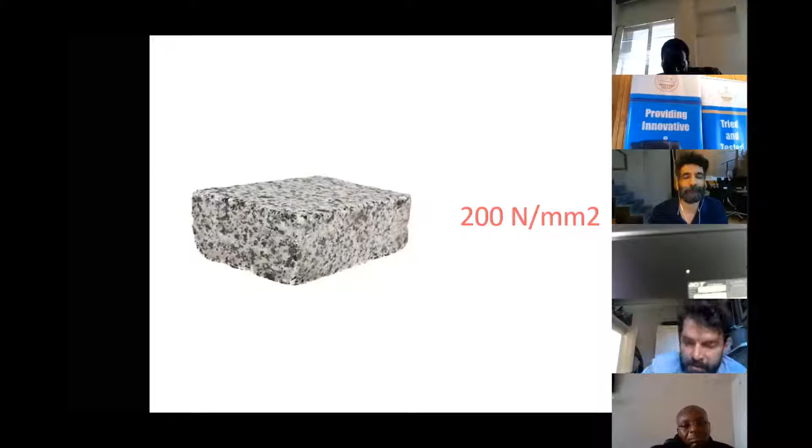Typical stone, so this is a lump of granite, might have a strength of 200 newtons per millimeter squared. We work with granite, we work with limestone, we work with lots of different materials. Even the weaker stones are about 100 newtons. We typically take that piece of stone, we crush it into gravel, we use an enormous amount of gas power, and we burn limestone to make cement.

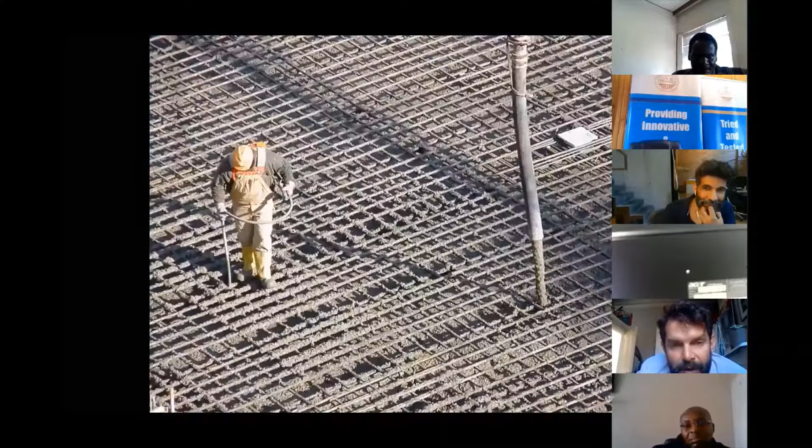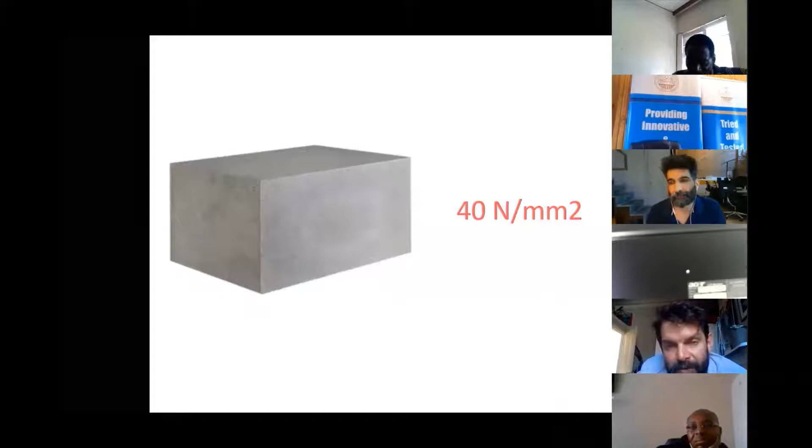We batch it with fresh water and sand, sharp sand, which is bizarrely becoming scarce. We get a lot of reinforcement, formwork, we pour the concrete, we vibrate it, we let it set. At the end of all of that, 28 days later, we have a piece of concrete with a strength of 40 newtons. So my contention is that really it would be much better just to use the stone in its raw state, far less energy intensive, far quicker, far less involved.

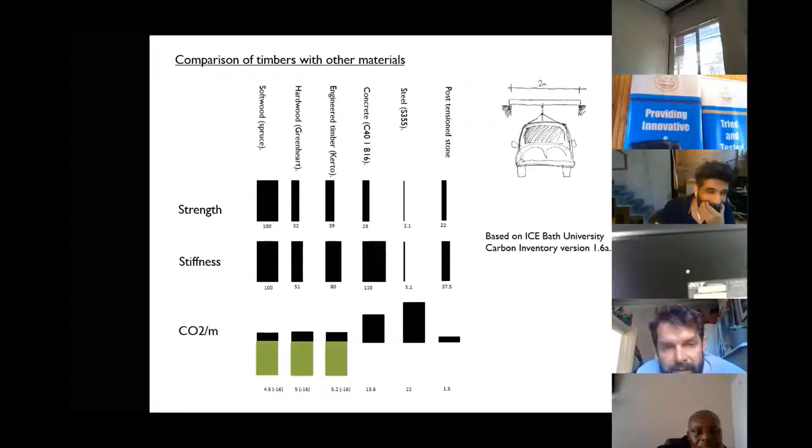We're quite often trying to compare the effectiveness in terms of carbon footprint of different kinds of materials. So this is a slide that shows a whole series of beams that can support a 1-ton car across a 2-meter gap. On the top row, all of these are strong enough. So you have the softwood, 100 millimeters by 200 millimeters. They're all equal depth. Hardwood, engineered timber, narrower. Concrete, 28 millimeters, and steel, 2.1 millimeters. These are not sections that you would necessarily use, but they're a pro rata rectangular section depth.

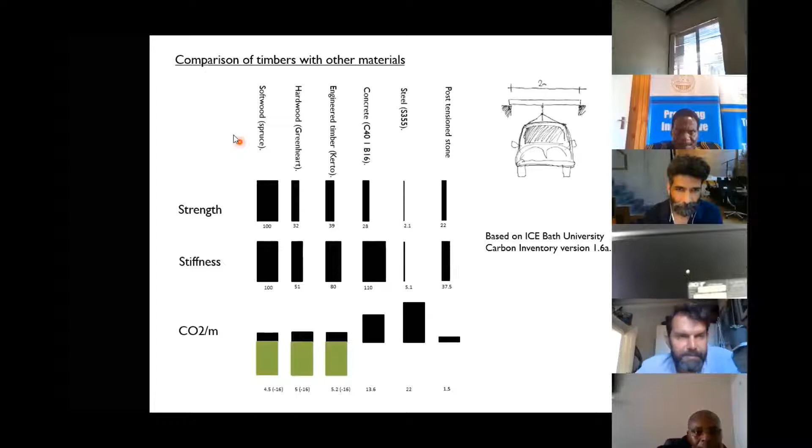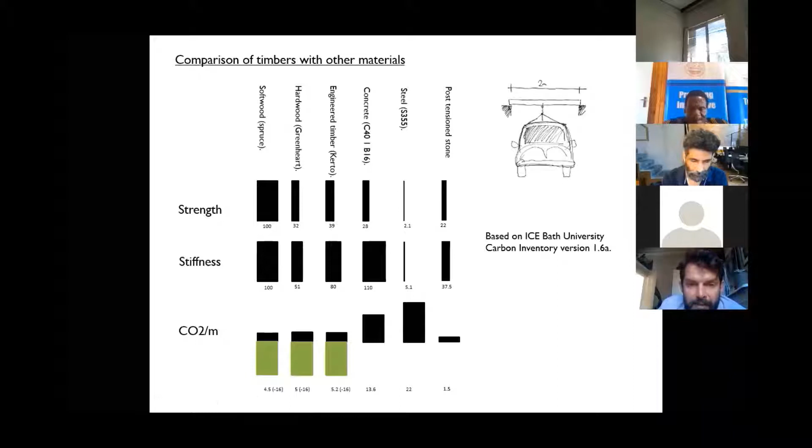On the row below are the stiffnesses. The stiffness relationship is slightly different from the strength relationship. And on the bottom row are the carbon footprints for each of those beams. So this is comparing the effectiveness of the beam in achieving a particular goal and the carbon footprint involved in achieving it. The steel has about 22 kilograms of CO2 per meter, concrete about 14, post-tensioned stone, that's a stone beam with a piece of post-tensioning rebar through it, has about 1.5 kilograms of CO2 per meter. So you can see that in comparison to steel and concrete, stone is really effective.

So I'm just going to see if I can change that slide.

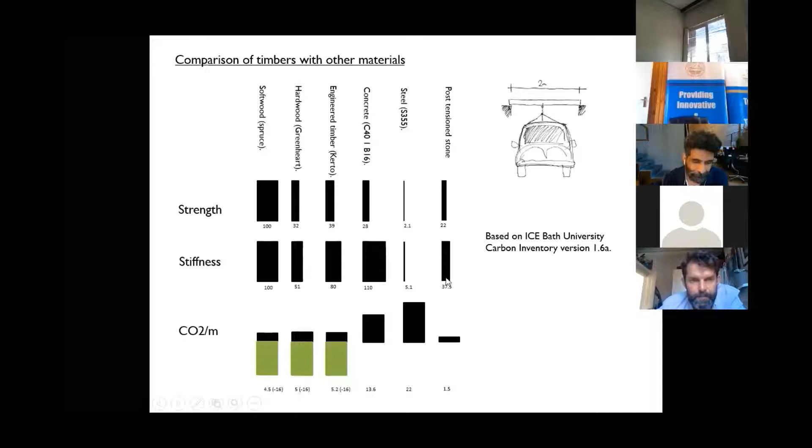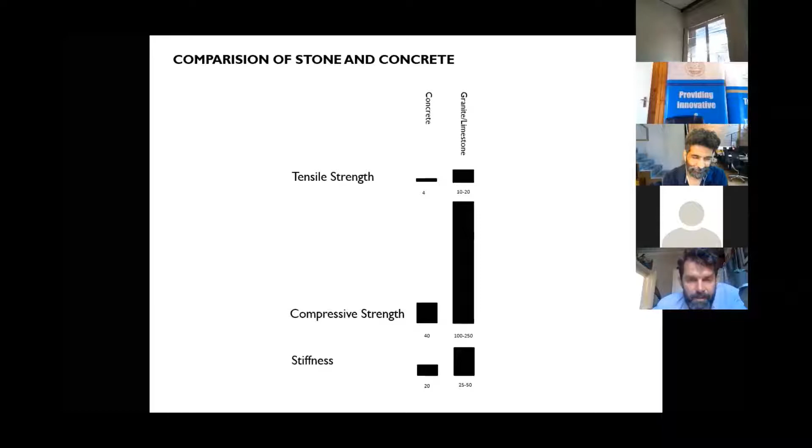Then the stiffness. Stone doesn't suffer from shrinkage and creep in the way that concrete does. So one of the main drawbacks with concrete is obviously the long-term creep and the shrinkage effect of the concrete. Stones behave differently. Different kinds of stones behave differently, but by and large, stone doesn't suffer from that kind of problem. But on the other hand, stone is a natural material.

And I think engineers and other practitioners prefer a homogenized material because they know how strong it is. So if you kind of whip everything up in the blender like concrete and then you let it set, then you have quite a consistent material achieving similar cube strengths all the time. Whereas with stone, it's more of an unknown quantity. People don't know what to expect.

So we take samples of the stone that we're going to use. We test all of those samples. We take 10 to 15 samples in flexure. We do a normal distribution of those. We take the lowest expected value based on 2 standard deviations. And we apply quite a high factor of safety. So we're totally secure that the stone is going to be acceptable in its use with that level of redundancy.

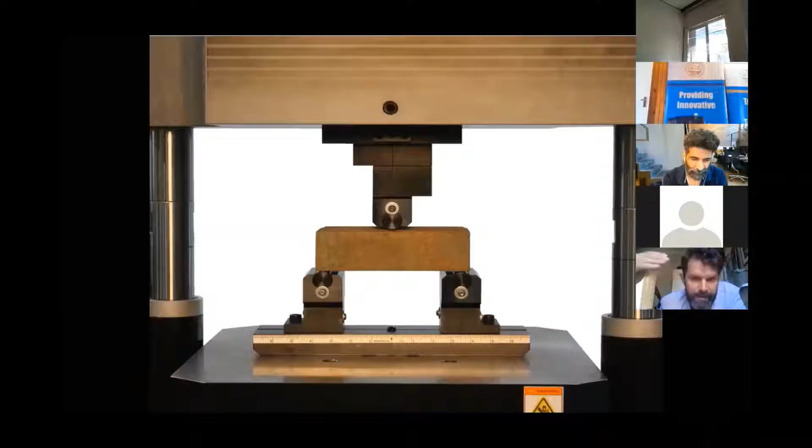Actually, if there's a future for stone, I think it'll be in better assessment of strength, non-destructive assessment of strength. So this piece of limestone here failed at something like 60% of the expected value because of the ammonite. The ammonite is in the worst possible direction for reducing the strength of the section, and it's completely invisible from the outside. So you need to account for all of those variations.

We started designing stone. Well, in actual fact, this is what we would describe as a cantilever stone stair. It doesn't actually cantilever. The tread above pushes down. The tread below supports it. The tread in between is prevented from rotating out of the way by its fixity to the wall. So we're converting what is a cantilever moment, normal to the wall, into an in-plane torsion of the wall connection, which means that you can get stone stairs to stick out of walls in that way.

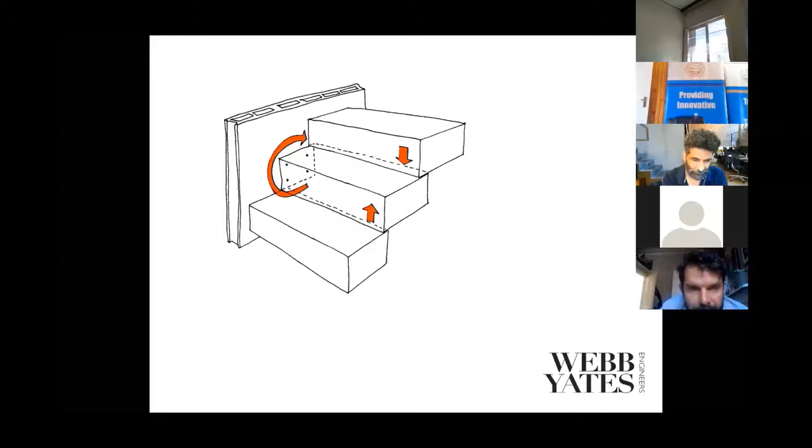So we started designing staircases like this with timber. So this is a staircase that I made myself, which is why the workmanship is so terrible. But this is a whole series of plywood boxes screwed onto a 50mm terracotta wall in my flat in Spain. 6 wood screws, wall plugs, bit of glue smeared over the paintwork. This wall is 50mm thick, hollow terracotta tiles. There's absolutely no way that this is cantilevering. So this is a kind of demonstration of that principle.

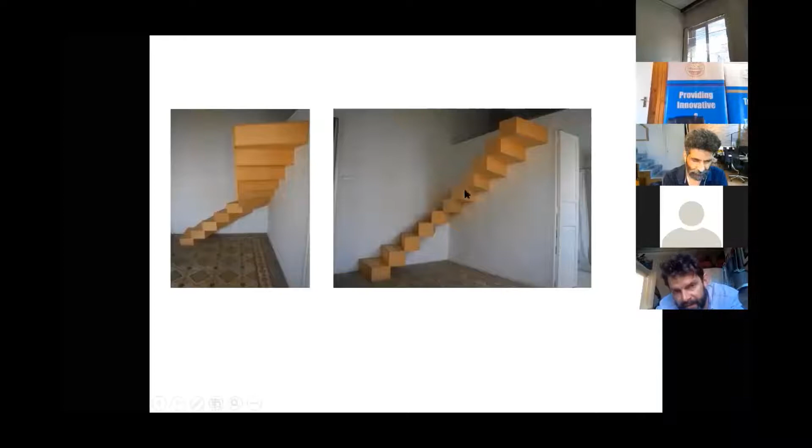So we started doing lots of staircases like this. The one on the left is a solid oak one, and the one on the right is a plywood one. Pierre, the stonemason, came to us and said, well, if you can design these stone staircases in timber, then maybe you can design them in stone. So we started to design what we would call, in inverted commas, traditional stone cantilever staircases.

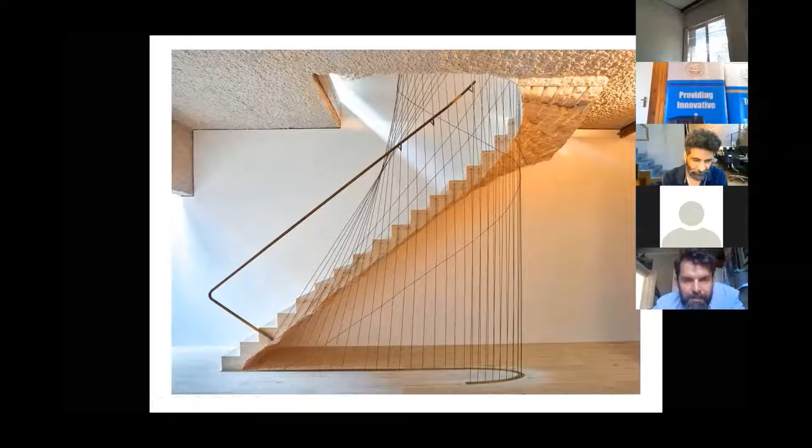This is a modern version where we've cut away some of the low stress stone, and this is a project with Amin Taha Groupwork. So this is quite a non-traditional stair. There's a rough cut finish to the underside, but the principle of each tread being built into the wall and working in that way is the same. The cables in this instance are just for containment of the balustrade. They're not there to support the stone treads, and in actual fact, the cables take support from the stone rather than vice versa.

But Pierre, the stonemason that we were working with for so many years, could only sell staircases, or his company could only sell staircases to people who have a stair flight and an adjacent wall. So it's kind of limiting in terms of who you can sell stairs to. So he was very keen to develop a free spanning stone solution.

So we started looking into reinforcing the stone, and we're certainly not the first people to do this, although it's still quite rare. So this was an early test. It's a 3.2 meter span. They're 50 millimeter thick, essentially flagstones or paving slabs. There are two 8 millimeter cables with 5 tons in each cable, and the cables assume a parabolic trajectory so that the sag in the cables resists the dead weight of the stone, and the tension in the cables pushes the ends of the stone together.

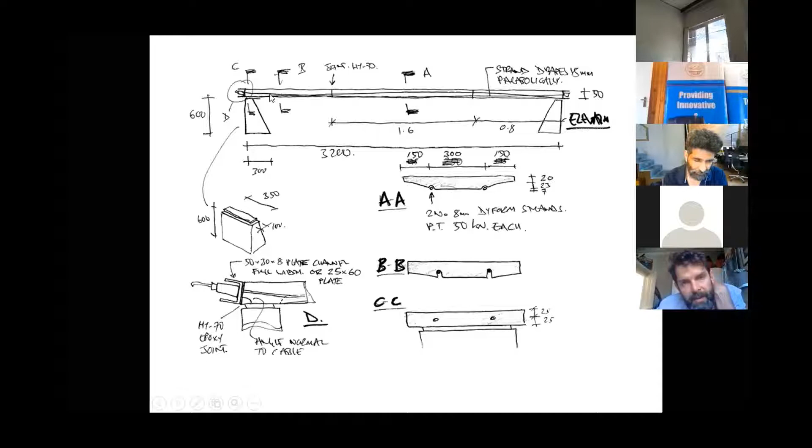So with this, we were able to make this bench. It spans 3.2 meters under a full domestic load, 50 millimeters thick. So to get the equivalent behavior out of concrete, you probably need 100 millimeters. So it's a very nice demonstration of just how thin and effective reinforced stone can be. We gradually started making small reinforced stone straight flights, and then helical flights, and got more and more ambitious.

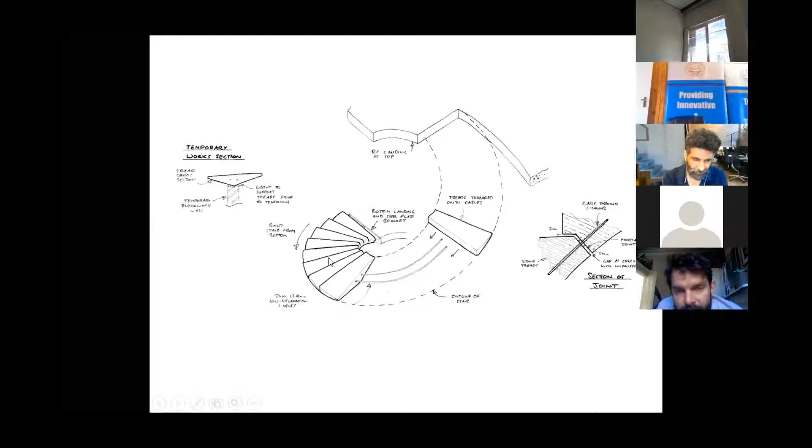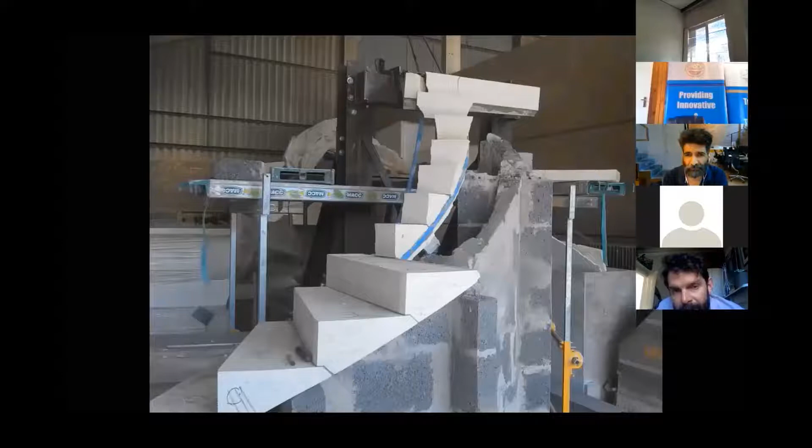This is a staircase in the north of England. It's got a 270-degree helix. It's got two 12 millimeter cables through it with 12 tons in each cable. This is a test with Pierre and Paul at the Stonemasonry Company. The tensioning order was very important. This test failed because the application of the tension wasn't in the right order. And it failed quite dramatically, but we learned a lot from that.

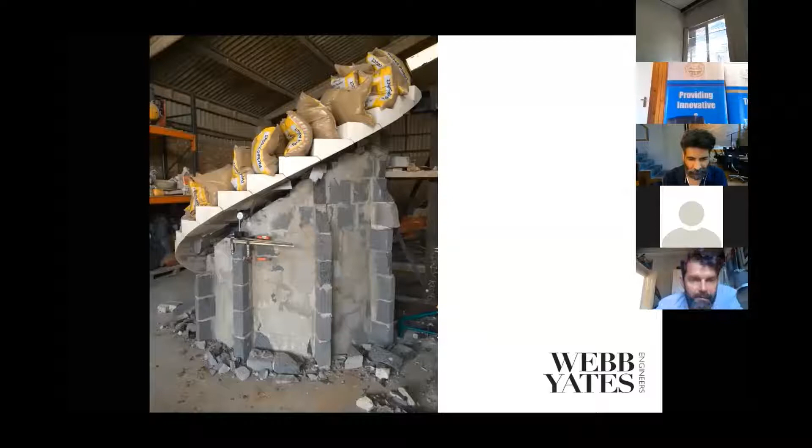And I think because there's no codification for this form of construction, you really have to kind of learn on the job, which I think is interesting and also a little bit intimidating sometimes. This was a successful test of that stair at 75%, and this is a finished stair. So we've done now, I would guess, 30 or 40 staircases of this kind.

That stair measures 1.4 meters. Each tread is solid stone. There are two 12 millimeter cables running through there. There are two flights, 270 degrees. So really that's quite a thing. And you know, we're getting paid reasonable fees to design things like this because they're for rich people's houses. But actually you can see from this demonstration that making simple columns and beams would be very easy, you know, by comparison.

Then we were designing some staircases that were, in this instance, going to be a steel stair clad in travertine marble. And we were thinking, well, we can post-tension the stone, make it solid travertine, post-tension it. But then we were thinking, actually, what's really interesting is not reinforcing it. So there's a whole wealth of Gothic architecture where people are building massive structures without any reinforcement, very pure, very simple. 1,000 years ago, I think we would really struggle to design some of those buildings today.

So this polystyrene model is the way that we were trying to work out whether this staircase would balance. So there are lots of different components in the stair that interact in different ways. It's quite difficult to analyze with a computer. If we can make it stand up in polystyrene, then we can definitely make it stand up in stone. So we were able to make this thing stand up. Because it's so light, if anyone breathed or sneezed or coughed near it, the whole thing collapsed. But actually, it will stand there for a few seconds.

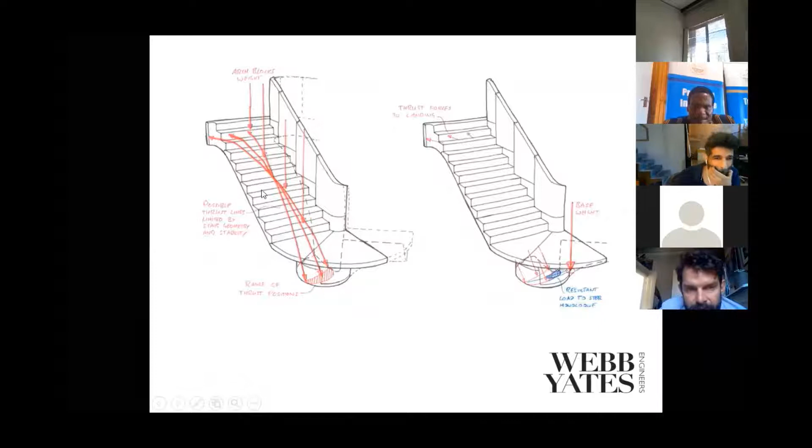So what we're doing here is forming an arch on one side, a traditional stone cantilever stair supported by the arch, and then torsionally interlocked segments on the landing. It's hollowed out to make it a little bit lighter, and that's the finished stair. So there's a balustrade, and all these stairs, we take the photos before the balustrades are fitted, so you can see more clearly what the structure is.

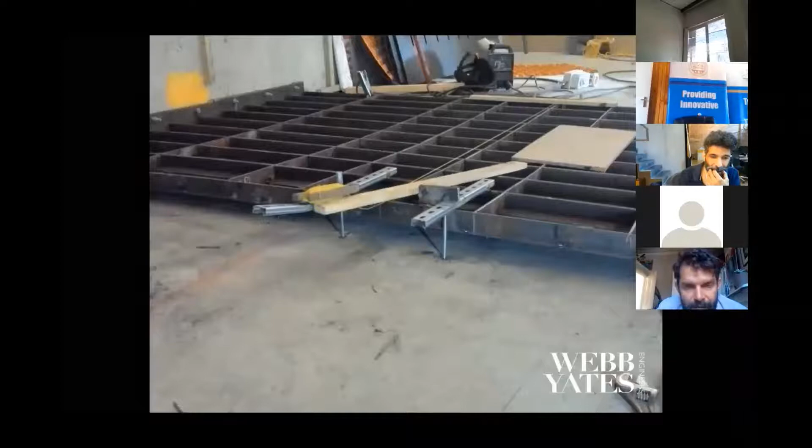This is by Atelier Romeo, Italian stonemasons, and Jamie Fobert, architect in London. But yeah, this is totally unreinforced. No steel, no cables, no tricks, just stone. It's on the 5th floor of a very old concrete building. We needed to support the weight of it.

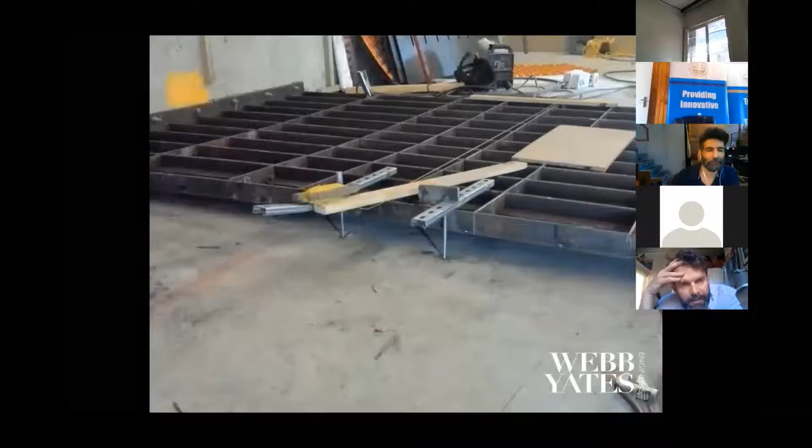Initially the idea was to have a whole series of very heavy I-beams to support the weight of it and actually step up when you got to the bottom of the stair onto a platform. But we were thinking it was a bit of a shame to have that interruption. So this plate is 50mm steel waffle plate. It's fabricated to curve upwards, and then it's jacked flat.

And then when the staircase is built on it, the weight of the stair equalizes the upward curvature, so that all of the dead load is carried to the supporting walls on the left and the right, and none of the dead load goes into the slab underneath. So it's kind of a good way of holding the stair up.

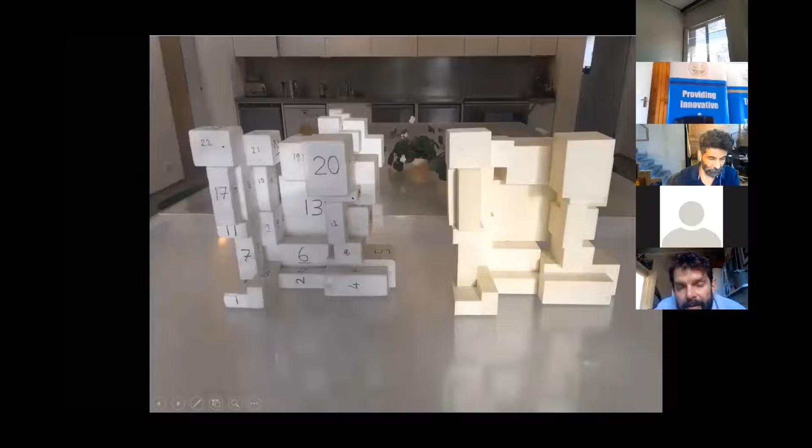He wanted this to last for 200 years, to be rebuildable, and so quite difficult to bolt it together. We couldn't see any fixings and connections. So that's Antony Gormley. So we were looking to see if we ordered the fabrication in a certain way, or we ordered the erection in a certain way, then we can make these stones lock themselves together.

So the one thing is they need to stand up under their own self-weight, and the second thing is if a bunch of drunk rugby players climb up the back of here and try and push that off, they can't do it. So we actually very slightly changed the order of the blocks from his original design. So you can see this block here catches the back of that one. So this one, which carries the load from here, is in balance with this one.

The head on top. There are a whole series of tenons and in fact kind of Lego studs that sat on top of the stone. So the stone, if you put one stone on top of another with a flat surface, obviously it rocks because the surface is never completely flat, and as a consequence you don't really know where it's bearing.

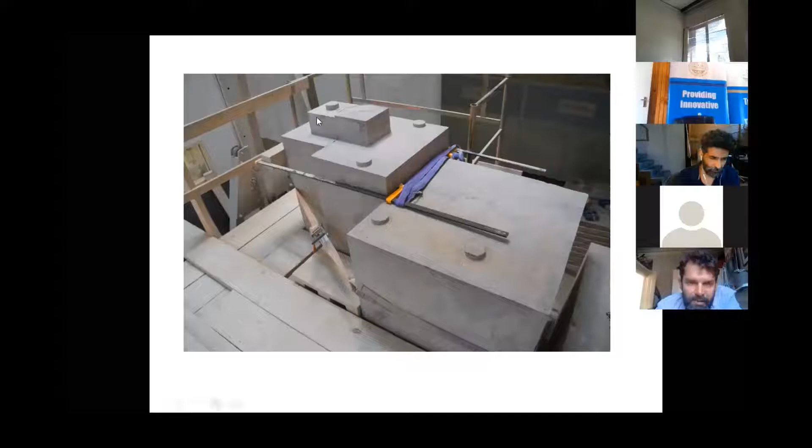If you put 3 Lego studs, you know exactly where it's bearing because it can only sit on the 3 points. So all of those connections are made with these studs. Occasionally there are projecting tenons that are brought together by a subsequent stone. And then this project is Amin's building in Clerkenwell that he's no doubt going to talk about in more detail in a moment.

We developed a lot of know-how with stone because we're designing rich people's staircases, but actually our idea is that it's quite a good thing from a sustainability point of view and just from a point of view of pure logic, to reintroduce stone as a structural building material. So we had the opportunity with Amin to design this building.

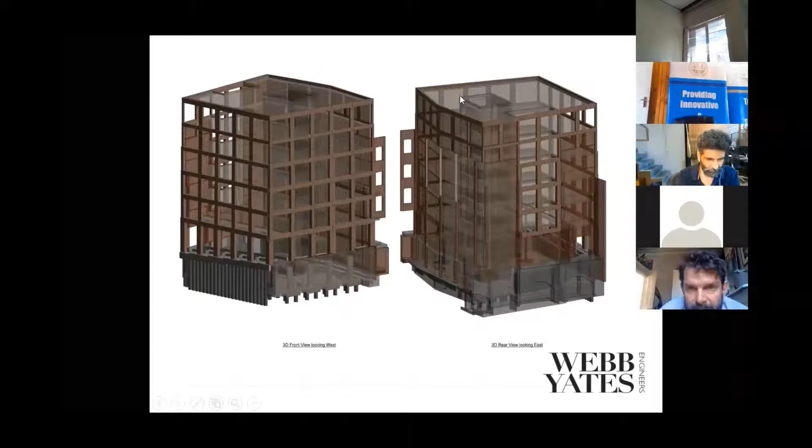It's a concrete frame on the inside. So you can see this is our Revit model. You can see the core, concrete stability core, 275mm thick flat slabs. That's the only concrete structure, no columns. So all of this brown stuff is the stone, load-bearing stone supporting the concrete slabs.

So here you can see, because you don't want to have a concrete contractor coming to site and building a little bit, and then a stone contractor coming and building a little bit and going away again, and then the concrete guy coming back and them all blaming each other for delays and interruptions on site, we thought it was a better idea to build the whole concrete frame first and then to build the stone afterwards.

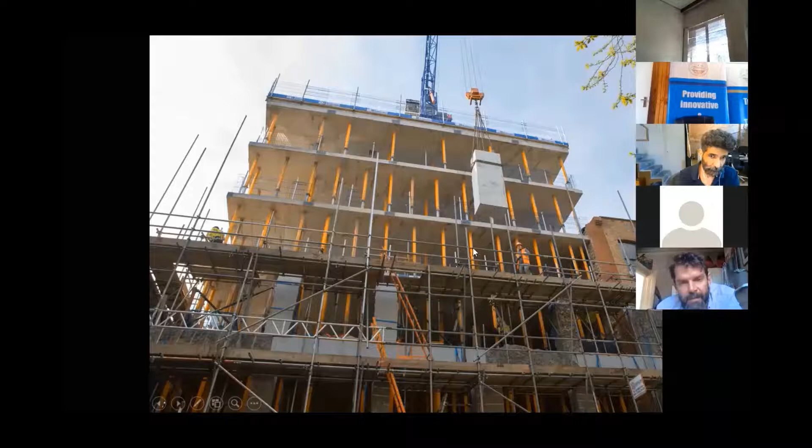So the whole concrete frame is built on these yellow props, temporary formwork, and then the stones are lifted in single pieces, then the temporary props are removed. So that's the finished thing. People are very surprised and really pleased that it's a load-bearing stone building. I mean, they're load-bearing stone columns. It's been going on for thousands of years. I think it's somewhat surprising that people are so amazed by it.

We were thinking, what can we do with stone in other parts of the building? So if you make a stone vault, it's obviously got a lot of curvature.

It's not very convenient for a lot of building types. How can we make a flat vault? So these are 40mm Portuguese limestone, 500mm square tiles. So rather like a plastic tile puzzle where you make the face of Mickey Mouse or whatever, the plastic tile puzzle doesn't have any rails in it. The tiles don't fall out because they're interlocked torsionally.

So here, this is supported on the edges; it spans 3 meters in both directions. There are no cables or reinforcement. The corners are clamped together so they can't move up and down next to each other, but that's the only connection between the stones. There's no moment connection between the stones.

Basically what happens is one piece of stone is supported on 3 corners, making the 4th corner stable. The next piece of cut stone is supported on the 2 edge corners and the corner of the first bit of stone. The one after that, the same. So subsequently, you can build the whole thing out like that in maybe an hour and a half or 2 hours. We built this thing.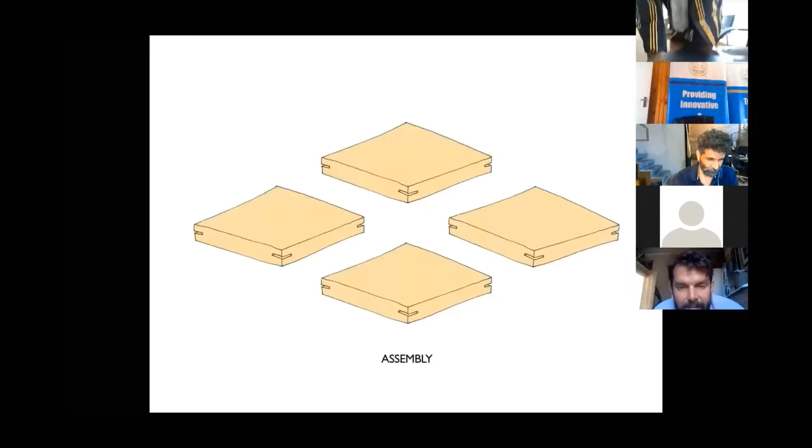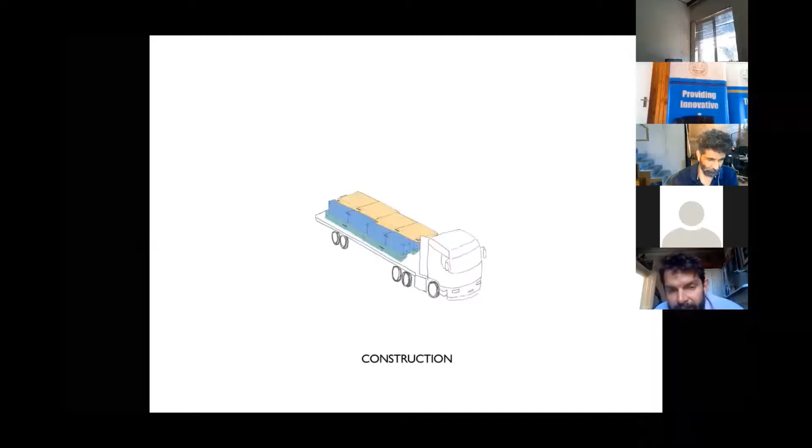So this is kind of postulation for what a building system of that kind might be, bringing together the various things that we've learned with staircases and Amin's building and other stuff. So you might have standard beam components that are post-tensioned together, standard column components and floor plates, build columns and beams and floors. There's hardly any reinforcement in this, very low carbon, it's demountable and rebuildable.

So this was a kind of prototype, not a very pretty prototype, I have to say, of that kind of construction. So you can see the beam, the end of the post-tension rod columns, and the floor plates built into there. And there's me jumping up and down on the end of it.

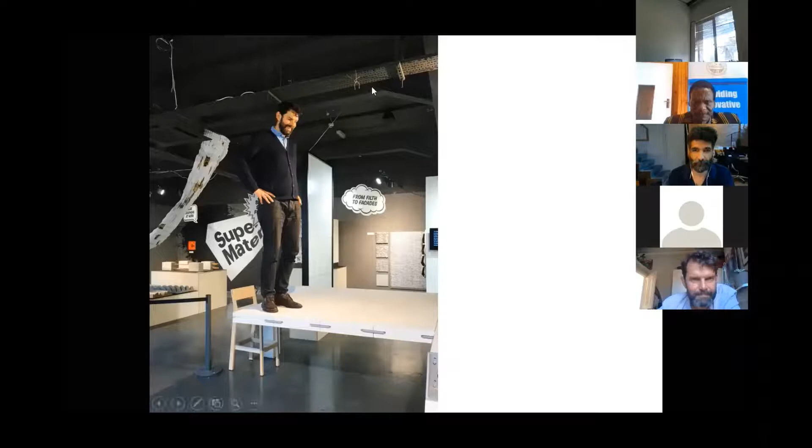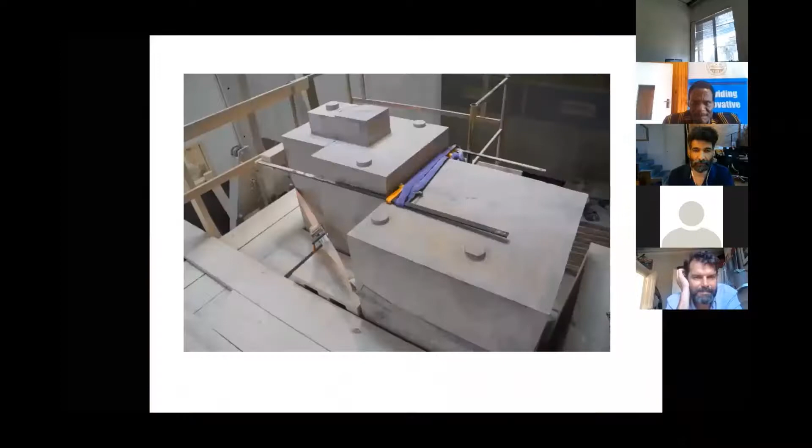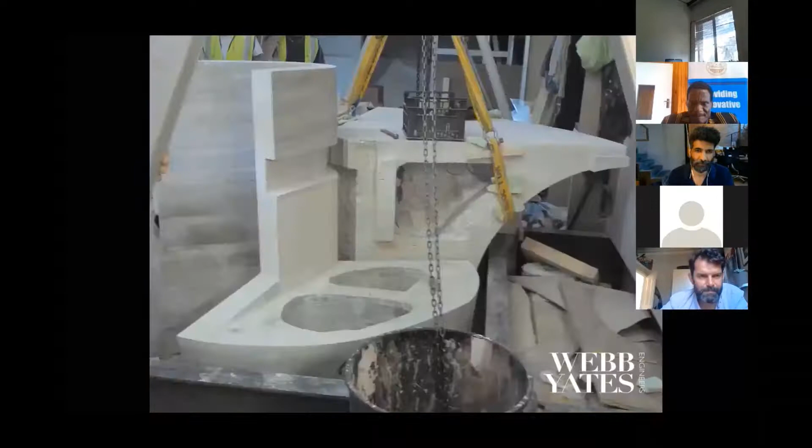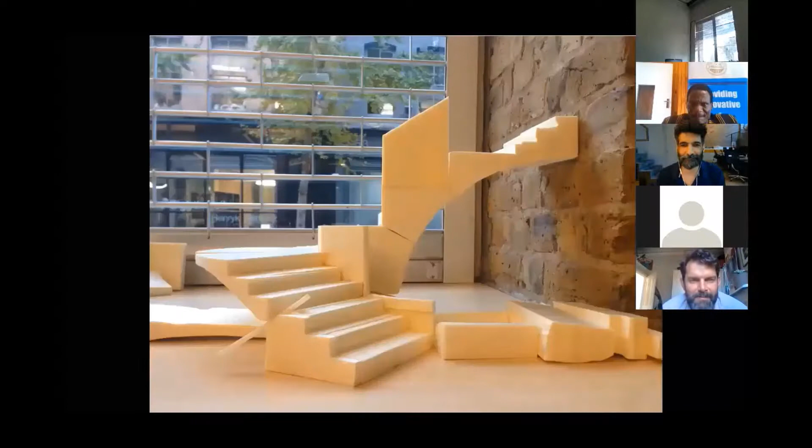Okay. Aha, I think I've got control. There you go. Where was your Caroline Place, before or after this? About a quarter of the way through, before. Keep going. Blimey. It's an epic, isn't it? So everyone's still here. You're going the wrong way. Oh, I thought you said after. Okay. Thank you very much. No, it definitely is because it's before all this. Oh yeah, there we go. Is this the only slide you have of it? Yeah. Okay.

Now, the only thing I'll add about this is, if I can annotate, this staircase is essentially, as Steve described, bolted into, fixed into the wall, and then obviously one tread is resting on the other. Now, normally with these sort of staircases, you'll end up with about 40% of stone wastage.

What we asked the stonemason to do is essentially take one block and cut it into two treads, so it minimizes the wastage. It's much easier to do when you get a straight run, but slightly complex once it becomes a spiral or a helix. But what they did is, you can see there on the underside of the stair are the drill marks of the splitting. So they had to drill them at a continually curving, if you like, angle, to manage that. But what we learned was, one, you minimize wastage, so the staircase is ultimately cheaper.

And as Steve has described, it's done in a single material. There's nothing particularly complex about it. It's fairly inexpensive, and you get, this is in travertine, a fairly beautiful result at the end of it, including where you would like to retain perhaps the actual extraction of the stone itself. In this form, the drill marks, the stone extraction from the quarry, and stonemasons working.

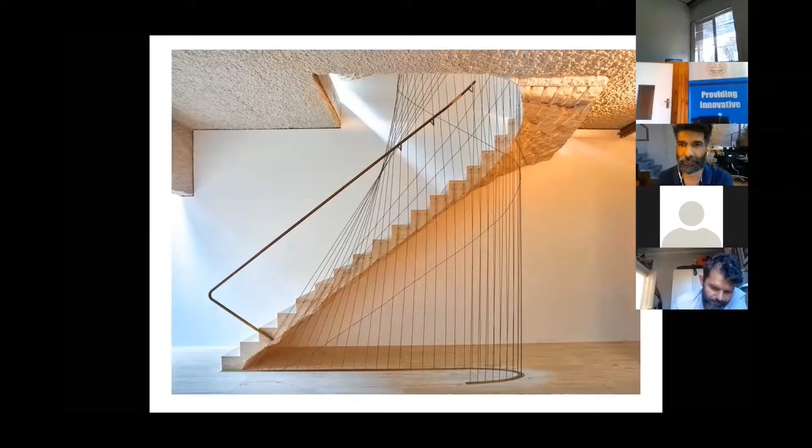Okay, so if I try and mouse on to the next slides.

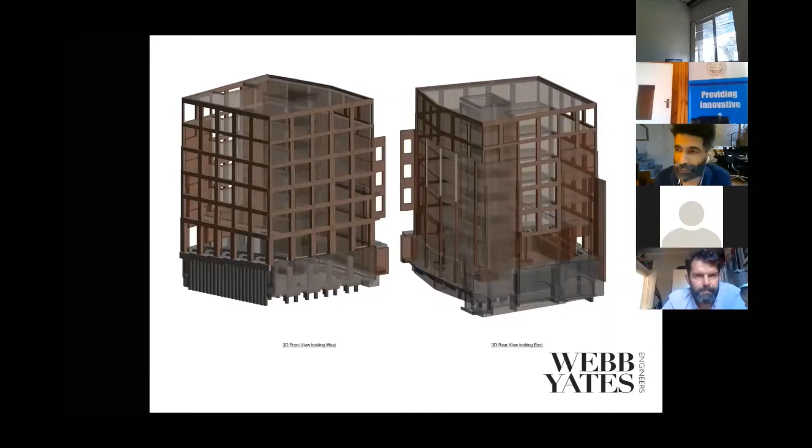When we came to actually undertake a building itself, which is obviously an unknown, it's a challenge that in England no one's undertaken for about 100 years. So the knowledge wasn't really there at all. And when we talked to our design team, obviously Steve is up for the challenge and imaginative with the challenge, and Pierre, who might join us later, a French stonemason working on those staircases.

Now, the difference between French stonemasons and the rest of Europe is that they have, I guess, an unbroken chain of education for about 1,000 years of working with structural stone, while in the UK, all our stonemasons are trained in decoration alone. They haven't any idea about how to use stone structurally. So we asked Steve and Pierre if it was possible to use stone for structural purposes on a building.

And the answer from Pierre was, well, actually in France, after the Second World War, it was called austerity construction, because it was far cheaper to extract stone and build housing up to 8 stories tall, ground plus 8 floors, in stone than it was in steel or concrete. We asked, well, what happened? Why was it stopped? Well, because after the Second World War, politically, steel and concrete was emblematic of the modern age, modernism, if you like, and stone was emblematic of the past, the generations that had brought Europe to war.

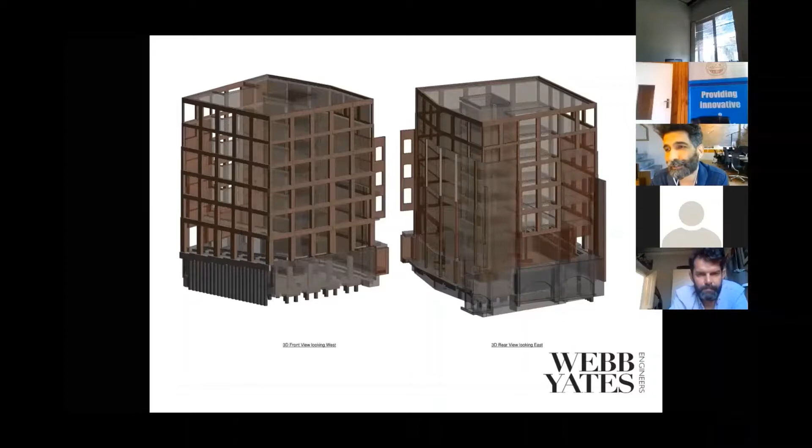And politically, everybody was much more keen on the idea that all new housing, the rebuilding of Europe, should be fully modern in its appearance. So despite the cost, steel and concrete took dominance, and stone skills began to diminish. Now in France, those skills are still there. So we set the task to our French stonemason to work with Steve and educate essentially some UK consultants.

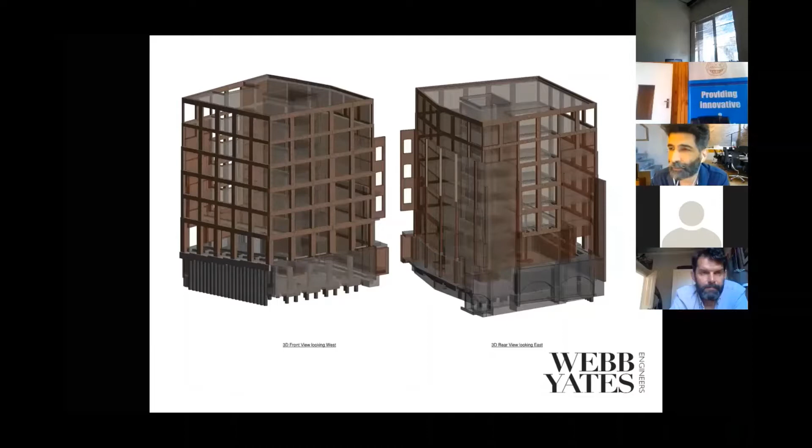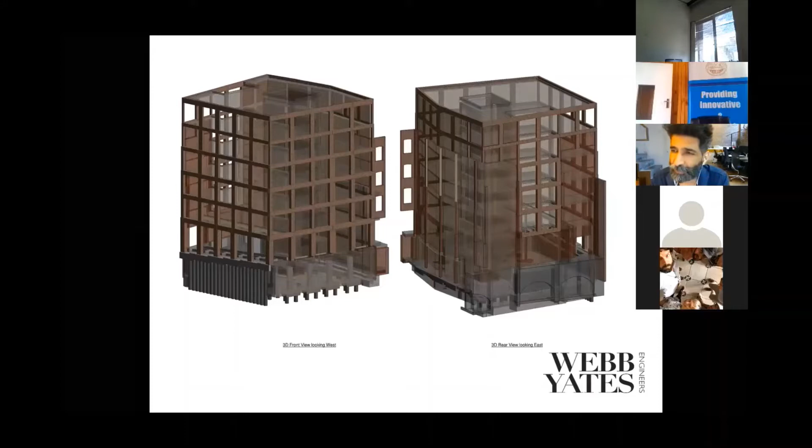And what we quickly found out was that the UK consultants, the cost consultants, the project managers, were under the impression stone would be highly expensive and complex, take a long time. Surely stone must be expensive. No one's worked in it purely because it must be expensive. And it's very easy, obviously, to test that. We asked Pierre, how are you going to give us a cost? He asked Steve, simply calculate the volume of stone that's required for each column and each beam, add that together as a full cubic meter volume, give it to me, and I will give you a cost for extracting the stone from the quarry, transporting it and erecting it on site.

That cost was a fraction of the equivalent steel or concrete frame structure with all its layers that we require in the UK. Those layers are for fireproofing, waterproofing, and thermal separation. All those extra layers obviously add complexity to the construction, not just in the material, but also the different trades, the different men that have to come on site and do each one of those. If you remove all those and just have a stone column that performs all of them in one go, i.e. you lift it into place, that's it, no more other layers, the cost of the superstructure suddenly reduces.

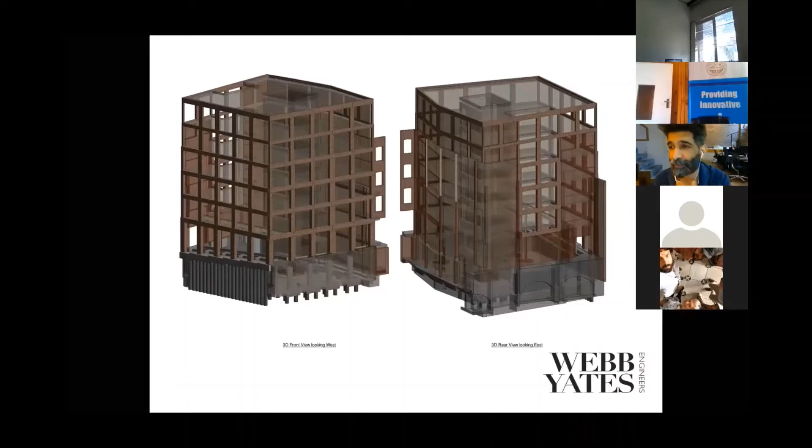So that was a surprise to everyone: the cost consultants, the project managers, and obviously us as architects as well. And the question was raised, well, why don't we use it? And of course, I've given you part of that reason, because in the post-war period, we wanted to be emblematic of modernism, and everything should be in the modern materials, as it were.

So here you can see that slowly we're learning year by year more and more lessons. Here you can see we opted for a concrete slab, and if you look carefully, at the edge of that concrete slab are cast in metal receivers. So the stone columns go up while the slabs are sitting on temporary props. Behind those stone columns are metal bosses that are wedged between the columns and beams, and then they're simply bolted to those metal receivers of the floor plate, and then you remove the temporary propping.

So there's your superstructure going up, and that's all automatically already fire rated, weathered and thermally broken, separated from the envelope. Hence the speed in construction and the reduction in other materials and trades that come on site. What we've learned since then is that instead of a concrete floor slab, what would have been far quicker would have been a timber floor slab. So here, slowly but surely, the construction method of cross-laminated timber is taking hold. Now, 10, 15 years ago, it was quite specialized, but it's becoming more and more common now.

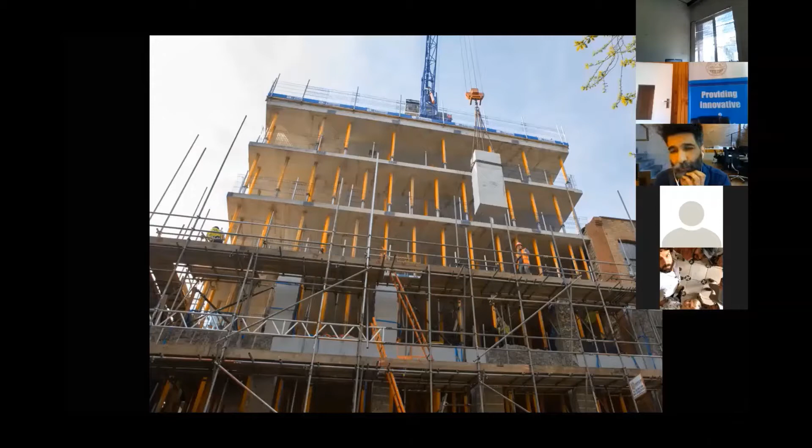Then you have a decision. Well, how do you finish that stone? You can take a number of architectural finishes to it, and traditionally it's called dressing the stone. So all the way up to 100 years ago, so call it the last 1,000 years in the UK, that stone would have been dressed in the Norman style, but ultimately still its superstructure, and that continued all the way through the medieval period, the Renaissance and neoclassical period, the Gothic revival period. All those buildings you see in the UK are still superstructure, so the structural engineering integrated with the architecture, and it's just dressing.

Here the decision was made once we saw the stone coming out of the quarry, that stone has actually got its natural sedimentary layer with ammonite shells, fossils, quartz pockets, and fossilized coral quite visible. We decided, well, why not leave that inherent beauty in the stone evident on the facade and leave it relatively untouched, which again obviously brings down the cost, because you're not bringing in extra cutting and carving.

So the lessons I think we'd like everybody to take away are that if you extract stone from a quarry, transport it and install it, drop it on site as the superstructure, it's a fraction of the cost of casting a concrete frame or erecting a steel frame, and then cladding it. Additionally, some of these lessons you learn as you're in that process, because no one's done it in this country for 100 years, some of the other lessons you learn are on sustainability, and as Steve has explained, our sustainability engineer informed us that we'd saved 92% of the carbon footprint of the building had we done it in steel and then clad it with all those extra layers.